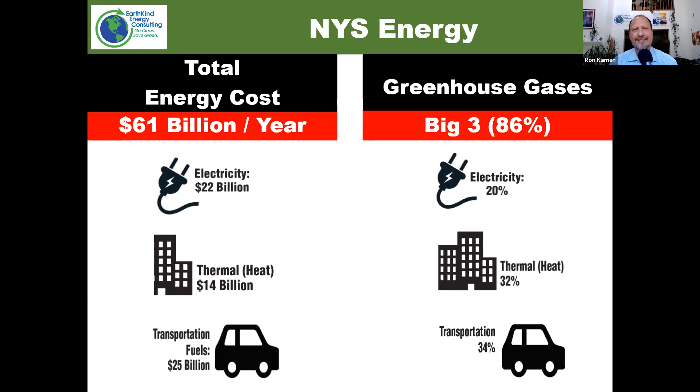And when we take a look and are concerned about our carbon footprints, we find that energy is 86% of the carbon that we generate. And again, it's in all 3 sectors. Thankfully, New York State has a very aggressive and progressive program to deal with that. There are millions and actually billions of dollars worth of incentives to help you make this transition. That's what the panel today will be talking about, specifically on the clean heating and cooling sectors, with both NYSERDA and Con Ed talking about the incentives that are available there. And we're going to have a deep dive into some examples of people who have done it already.

Not to let go, though, the other pieces we'll be touching on will be solar next week, where there's a tremendous amount of money that's available for solar, and we'll talk about that later. And then clean transportation will be the following week, where currently there's $650 million worth of incentives.

But last week there was the announcement of another $750 million to help you make the transition with electric vehicle charging stations throughout the state. So if you're interested in that, in 2 weeks, you'll have the opportunity to take a deep dive into those two sectors. And the third sector that we'll be talking about is investing, and we'll hit on that later.

Just to give you a sense, again, an overview, you can do this if you have capital, if you could take the tax credits with the incentives of both the cash grants and the tax benefits. You have a return on investment of at least 10%, up to 30% in most times, or even further. If you have no capital or you don't have the tax appetite, there's the ability to do this with third-party financing. So you don't lay out a dime, you just save money from day one, and you will be hearing about part of that model with geothermal heating and cooling in a moment too.

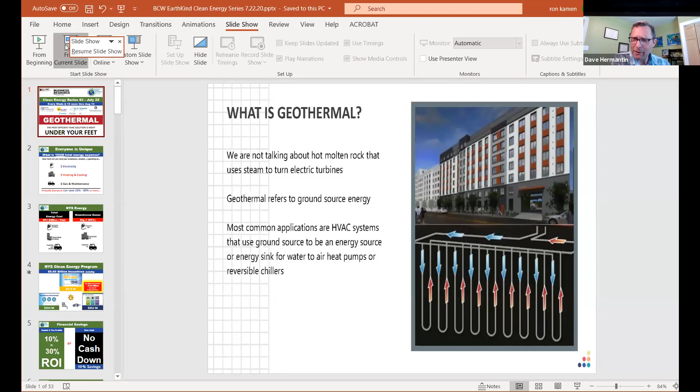So we make buildings perform better. Is this good now? Yeah. So a little bit about myself. As I said, I'm VP of Engineering over at Brightcore Energy. My specialty is geothermal. I've been working in the geothermal space for a bit over 15 years now, in the New York area, up through New England. I've been really fortunate to have worked on some of the big projects in the New York City area. I'm going to touch on those a little later in the presentation.

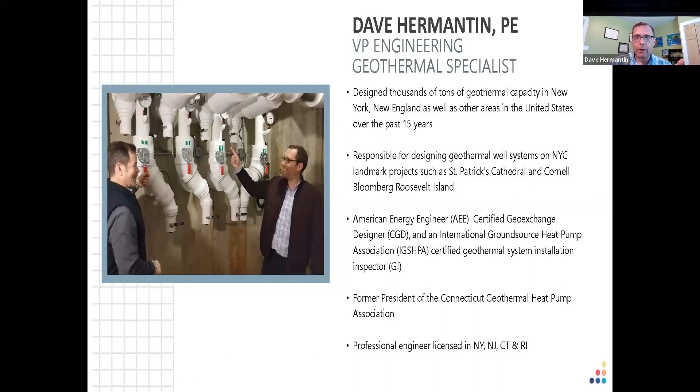Next slide. So first, what is geothermal? There are a lot of common misconceptions. We're not talking about tapping into hot molten rock that's used to turn electric turbines, create electricity. We're talking about ground source energy. And the application for this is to operate HVAC systems, either water to air heat pumps, water to water heat pumps, or reversible chillers that are used to condition buildings. Next slide.

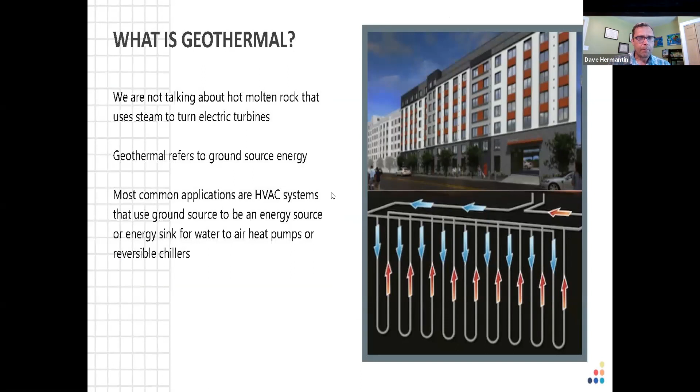I put this slide in here specifically because I've been involved in this business for a long time. And when the gas constraints were announced in the Westchester area, there was a lot of fear and uncertainty and blowback from the developer community. And one of the things that came up was that there are developers in the area that had problems with geothermal systems. And I know that firsthand. Some of the work that I've done has been troubleshooting and repairing geothermal systems.

And I can tell you in Westchester County, predominantly most of these problems were with standing column well systems. It's a type of geosystem that uses groundwater. And if your groundwater is poor quality, which is most often the case in Westchester, you're pulling it into your building and you're causing problems in your building. But that's not what we're talking about. Can we go to the next slide?

We're talking about closed loop geothermal systems, and modern closed loop geothermal systems, as I like to refer to them, don't use groundwater anymore. The water that is circulated through these systems is in a closed piping system, and it rejects heat into the ground in the summertime and it extracts heat out of the ground in the wintertime. And that makes for a super efficient type of system. I don't want to knock air source systems or VRF systems. I think they're great, but I like to say that geothermal systems are better. And that's particularly evident in the wintertime.

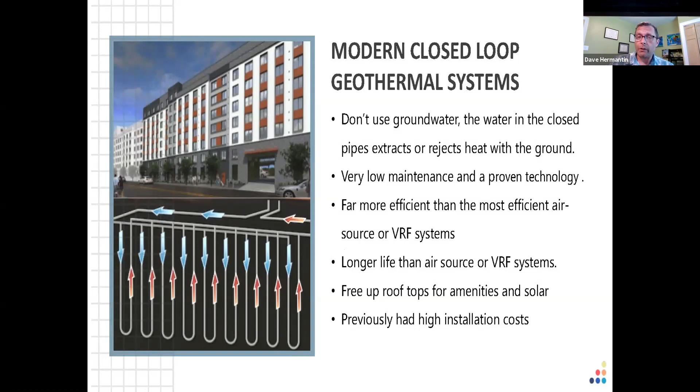So here I put this slide in the deck. It's common when I talk to a developer or a project design team, they ask a lot of questions, and a lot of them are common questions. One is, what happens if a pipe fails? We're very experienced and skilled at designing these systems, and also have rigorous testing protocol in place that we make sure that systems work right from day one.

But if a pipe fails, we can get to our pipes by isolating them in manifolds in the building, and we can patch and repair pipes just like any other pipe, a plumbing pipe that might be damaged. The piping is HDPE. It's warranted for 50 years. It's expected to last more than 100 years. And we're very familiar with these systems. I'm going to talk a bit about our Geothermal as a Service offering that, I guess, helps de-risk these projects.

Next slide. So our Geothermal as a Service, we design, build, own, operate, and maintain the ground portion of the project. So what this does is, it means that the risk is taken away from the mechanical designer or the architect. Yes, we're sharing all of our information in a very transparent way. And also, Geo as a Service is a PPA type of agreement that requires $0 up front from the developer. Can I go to the next slide, please?

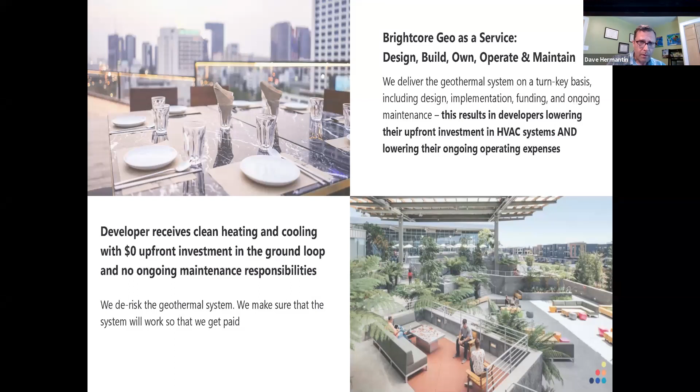So yeah, we like to get involved very early in the process. We're very used to working with A&E teams. We share all our intellectual capital, very transparent, so everybody feels comfortable about what we're proposing. We provide all the financial capital to install these systems. And we have a 30-year PPA style agreement, which greatly reduces the cost. So I'm going to show you an example of a project that we're working on with a local developer and see how that pans out financially.

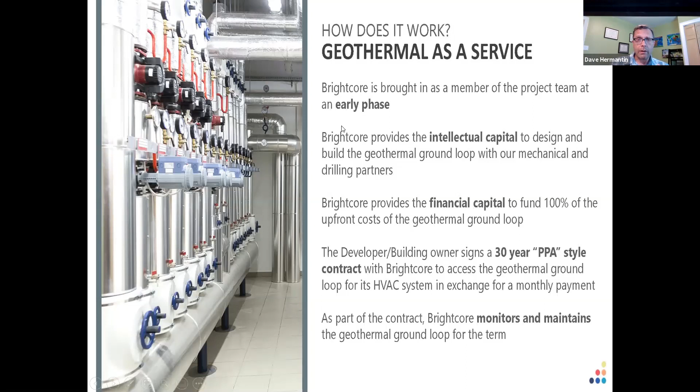Next slide. So yeah, we're reducing upfront cost, we're reducing energy costs, and we're reducing maintenance costs with these systems. Next slide. Additional benefits are reducing the amount of equipment that goes onto the roof of a building. So condensing units or cooling towers, those are going to be gone and free up open space for amenities or solar panels on a building.

Next slide. This is the example I mentioned. We're talking to a developer about a project that they're developing in Yonkers. It's a 235,000 square foot mixed use, predominantly multifamily housing and commercial. They're affected by the natural gas constraints. Their design included PTAC units, which anyone that knows what PTAC units are, they're very inexpensive. Pretty much the cheapest way that you can heat and cool a space in a building. They're very inefficient, and they have a short useful life, about 15 years.

So we took a look at our plans, and we designed a geothermal system with high efficiency, high quality geothermal heat pumps. Cost more upfront for the building work, $1 million more. But with Con Ed's incentives and the federal tax credit that's available for geothermal, that reduced the capital cost by $1.8 million, very significantly. So there's a CapEx savings to the developer of $800,000.

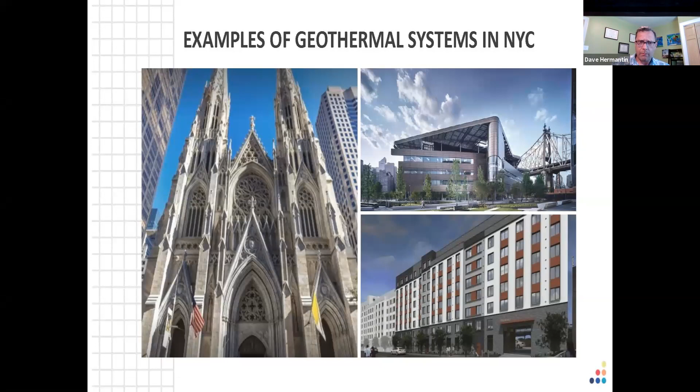On the upper right, that's on Roosevelt Island. It's the Cornell Bloomberg building, a very innovative type of geothermal system installed on that site. And in the lower right-hand corner is a building that Zach's going to talk about. That is the Beach Green 2 building in Queens, New York, where Zach and I worked together, and we built an awesome LMI housing project, or designed and built it for L&M developers. Next slide.

So yeah, summarizing, we are bringing to the marketplace efficiency, long operational life of HVAC equipment, de-risking projects, and allowing building owners to take advantage of great incentives that we're going to talk more about.

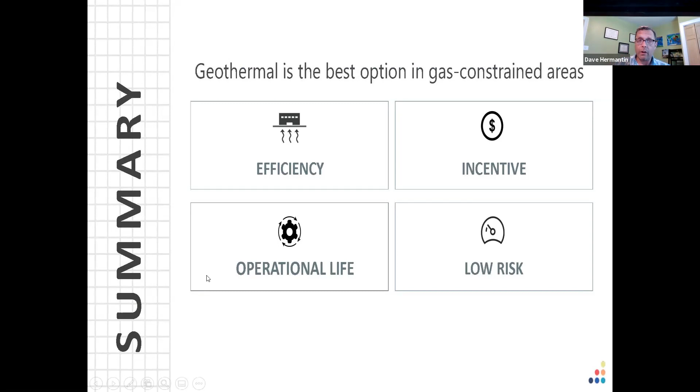Just wrapping up, Ron said, hey, what's the call to action for our business? And I'd say call to action is call us. We'd like to talk to you more about this. There's a lot of information to share. We provide free project assessments, and we have a lot of experience in this. We can do it very quickly and concisely. We would like to talk to you and your A&E team.

So just to go over the types of heat pumps and the different options. So once you electrify, you really have an air source heat pump, which are the units shown in this picture. And here they're installed on the side of the building. Most of the time they take up the valuable roof space, and they're noisy and they add some weight. But the main difference is the efficiency.

The most efficient units tend to be 14 or so EER and a COP of 3.3. And if you think about these as the gas mileage on your car, it's a linear relationship. The higher the number, the more you save. And just a straight electric resistance heater, say your toaster oven, has a COP of 1. So they're efficient. It's a third of the cost of running just say electric baseboard.

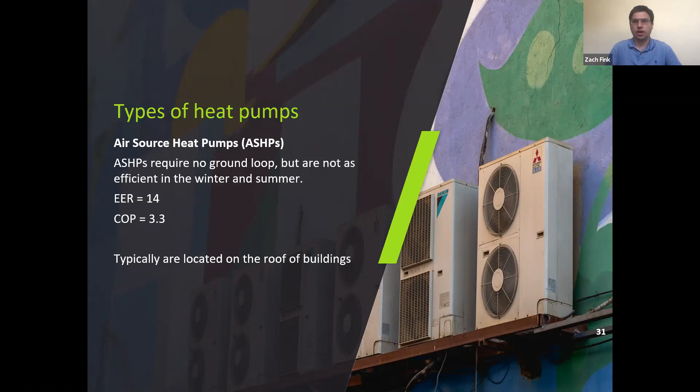But if you go to the next slide, Ron, compared to a ground source heat pump, we have a COP of 5, so we're 50% more efficient. And we have an EER of 30, which is twice as efficient. And it's all powered by the ground loop that could be installed under the building or in the parking lot or in some other space that's available.

And the beautiful thing is once it's installed, you don't see anything. You have a little pump in a mechanical room someplace, and the rest of the infrastructure is very similar to what your infrastructure would otherwise have been in the building.

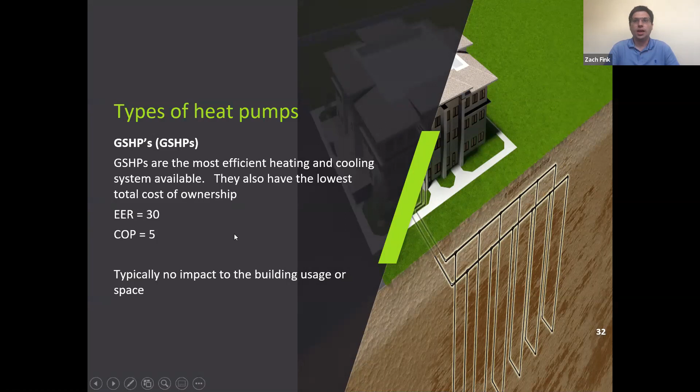Next slide, please. So just to compare the efficiency of the heat pumps as a visualization, ground source heat pumps, commercially really the highest efficiency you see is about 30 EER, air source heat pumps about 13, 14, and then PTACs, which a lot of our developers would otherwise use, hydronic PTACs to a boiler in non-gas constrained areas, are somewhere around 8, 9, 10 EER. So you can just see the comparative efficiency. Once you go to geothermal, it's the most efficient system you can get out there.

Next slide, please. So passive house construction typically adds about 5% of the cost. I always like to mention that geothermal isn't always free, but it's not as big of a cost impact as everyone imagines. And we always work with our client to try to figure out how to reduce those costs. Next slide, please. All right, next slide.

So what really impacts the cost of a system? Geology is probably the biggest one that we see. If you give me a project in Lower Manhattan, it's going to cost more than a project in Westchester or in Queens. And then the depth to bedrock and what's in the ground also affects it.

System design. If you want snow melt for the parking lot, that costs more, if you want a zone for every bedroom. But the things that would typically drive HVAC costs are the things that would drive a geothermal cost. And then I think the biggest one is the building construction and how the load of the building is being balanced. And I'll show you an example in a second of an exercise.

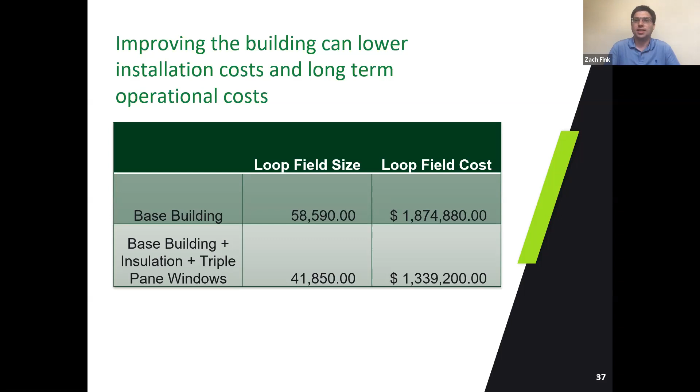So Beach Green 2 was New York City's first affordable housing project with geothermal that we know of. Next slide. So I'm just going to go over some high level numbers. Construction costs somewhere in the $1.5 million to $2 million range, 127 apartments, about 500 tenants in the building. And just to visualize it, in the parking lot in the back of the building, we have about 6 miles of pipe in the ground. Next slide, please.

$120,000 was about the rebate from PSEG. We estimate the Con Ed incentive will model similar because PSEG and Con Ed use roughly the same formula on a savings per kWh basis. Next slide, please. And again, the $10 a month for air conditioning compared to $100 a month.

Next slide. So we always get asked, what makes ZBF different? Why should you call us or someone else? When you pencil out the numbers for the projects we've been involved in residentially and commercially, if we look at full life cycle, 25-year savings, we have about $185 million of accrued savings for our clients. We've been involved in 1,000+ systems, and probably the biggest metric to us is that we have repeat developers coming back to us. So we have five projects now that the developers are repeating with us.

So what is the process? We do a free desktop feasibility study. Someone calls us up and says, what's involved in this project? And we can give you a rough idea of the cost involved. Can it fit? You're building a 50-story building or a 12-story building. The economics, because we also build projects on a certain scale, we can dial in what the construction cost estimates are. We have developers tell us that our numbers are accurate, where they typically throw away engineers' numbers. And then design, we have the ability to lead the design team from the idea to the completion and commissioning of the building. Next slide, Ron.

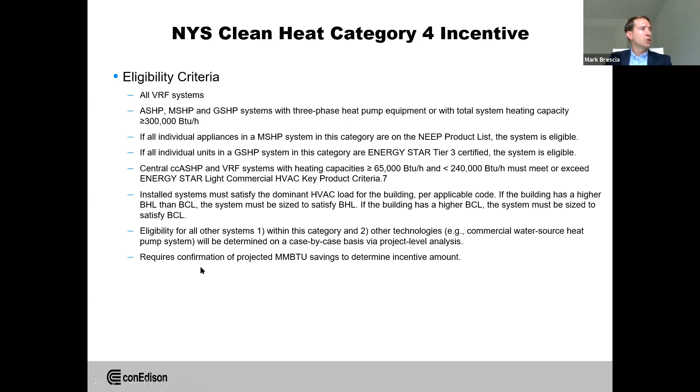So next slide, please, Ron.

When planning your project, it's important to connect with a Clean Heat participating contractor early in the decision-making process to begin conducting load calculations and potential incentive amounts. When equipment is selected and all costs determined, you can submit your application, and then Con Edison will schedule a site visit as well as an engineering review to take place to confirm the energy savings calculations done by your participating contractor.